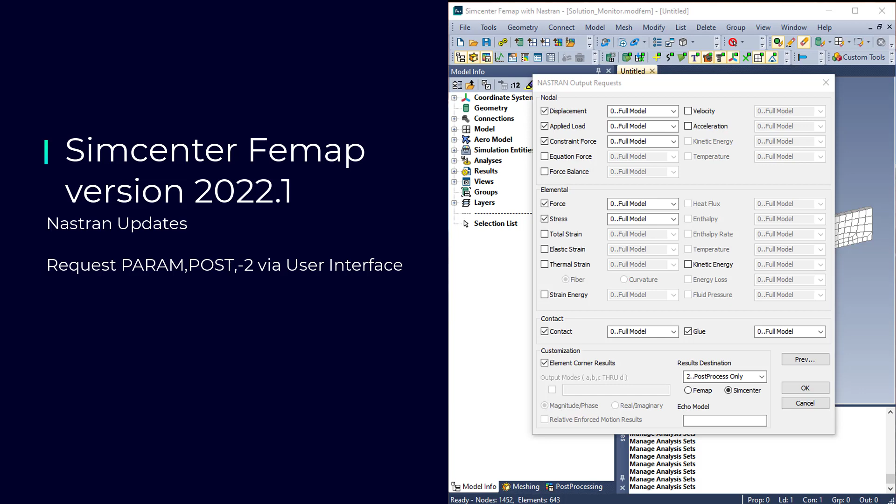In this video, we will be discussing some of the important updates made for Nastran, particularly Simcenter Nastran in Simcenter Femap 2022.1. The first update we will cover is the ability to request Simcenter Nastran to produce an output file, in particular an OP2 file, in a format which can then be used by Femap, other applications in the Siemens Simcenter portfolio, including Simcenter 3D, and other commercially available pre- and post-processors.

To have Femap request output be placed into the OP2 file in this format, we will use the Analysis Set Manager, go to Output Requests, and once in the dialog box, simply select Simcenter under Results Destination, and that is all that is needed. Now Nastran knows to create the param post -2 entry in the input file.

Should you want Femap to always create an OP2 file using param post -2, that can be done using the File Preferences command, going to the Interfaces tab, and selecting Simcenter for the Results Destination option.

One additional thing to remember is that some pre- and post-processors which can read OP2 files created using param post -1, which is the Femap default, require that the model information also be in the OP2 file, which is done by setting param OGEOM to a value of yes. By turning on the Activate OGEOM parameter in this same dialog box, all newly created analysis sets will have the OGEOM option turned on automatically.

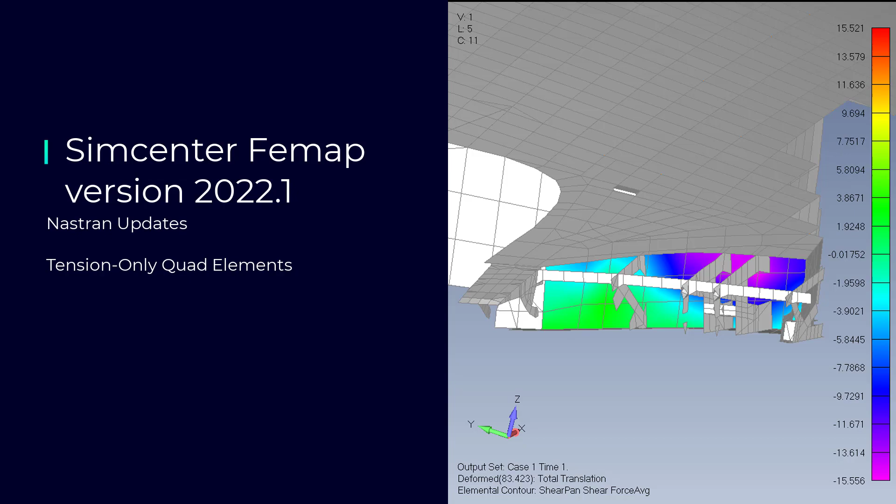The next update we will discuss is support for tension-only quadrilateral shell elements, which has been added to the multi-step nonlinear solution sequence, Solution 401, for Simcenter Nastran 2022.1. The tension-only quad can convert from behaving like a shell element to instead behaving like a shear panel element based on a component direction and a compression allowable, both specified by the user, which then creates a PSHLPNL entry in the Nastran input file.

In Femap, the behavior of tension-only quad elements is controlled by specifying property extensions, which are available when defining a plate property. Simply select the Simcenter Nastran tab, then specify which component direction to use for every quad element referencing that property, such as use X membrane stress or one of the other options.

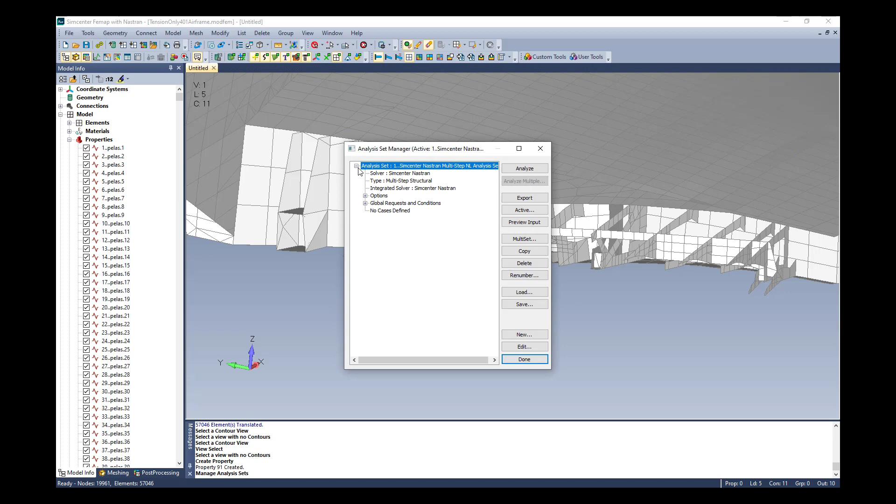You will then also want to specify a value for compression allowable, which is used to determine when a shell element will start to behave like a shear panel. Once converted, the element retains shear panel behavior for the remainder of any sequentially independent subcase and any sequentially dependent subcases which follow. After the property extensions have been specified, the TENSOQD parameter can be specified in the Analysis Set Manager to control the behavior of tension-only quads.

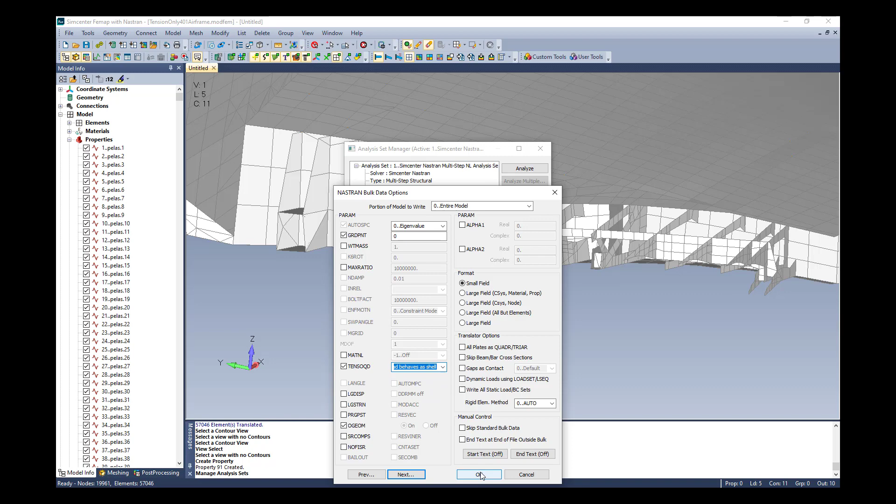By default, the ability to have shell elements convert to shear panel elements is active, but can be deactivated by turning on TENSOQD and setting it to tension-only quad behaves as shell. In addition, anytime tension-only quad property extensions have been defined, the ESHLPNL entry will automatically be added to case control of the Simcenter Nastran input file.

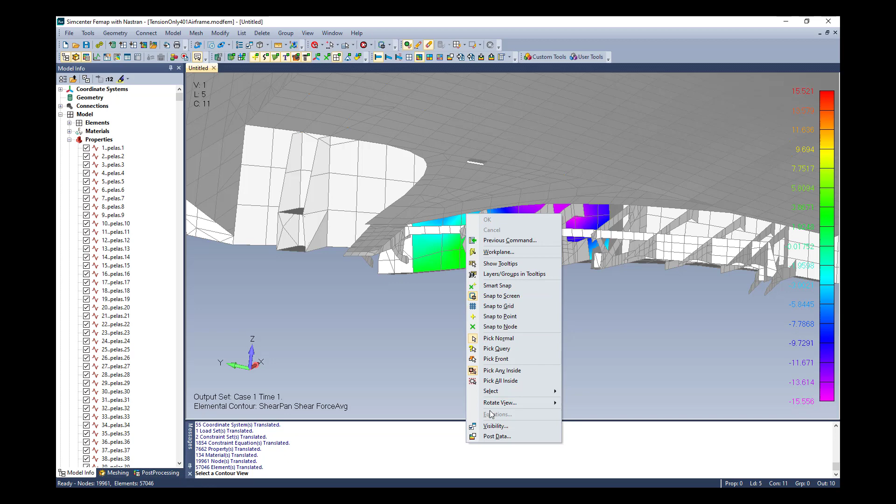Once the analysis has been completed, it is easy to visualize which elements have been converted to shear panel elements by displaying shear panel results. After looking at the shear panel results, it is also possible to look at the shell element results to see which elements were not converted to shear panel elements.

Support for a new way to specify control options for the dynamic design analysis method, often called DDAM, has been added to Simcenter Femap 2022.1. DDAM is performed in 3 steps. First, Simcenter Nastran performs a modal analysis on the structure to calculate the modal participation factors and modal effective mass for each mode. Next, the Naval Shock Analysis Fortran program, NavShock, uses the modal effective masses and natural frequencies calculated by Nastran, along with user inputs, to compute shock design accelerations.

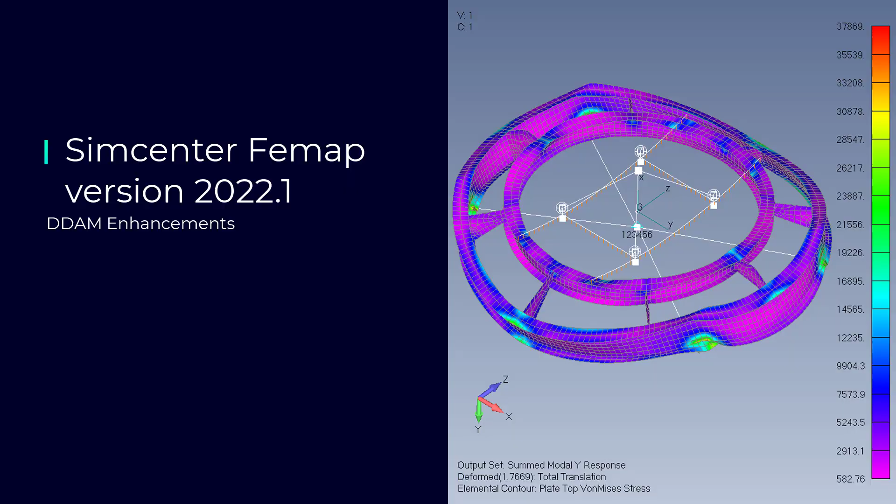Finally, Simcenter Nastran uses the shock design accelerations along with the modal participation factors and natural frequencies to compute the shock response of the structure. The first thing needed within Femap to run a DDAM analysis is an analysis set specified to do a normal modes eigenvalue solution. Once that has been specified, most everything else is controlled via the Nastran DDAM solution options dialog box. So the first thing you want to do is enable DDAM analysis.

If you choose DDAM, that's going to run DDAM using the legacy method. So what this entails is the creation of multiple external files, and all of these options in here basically get written to a control file, which is then sent to the NavShock program.

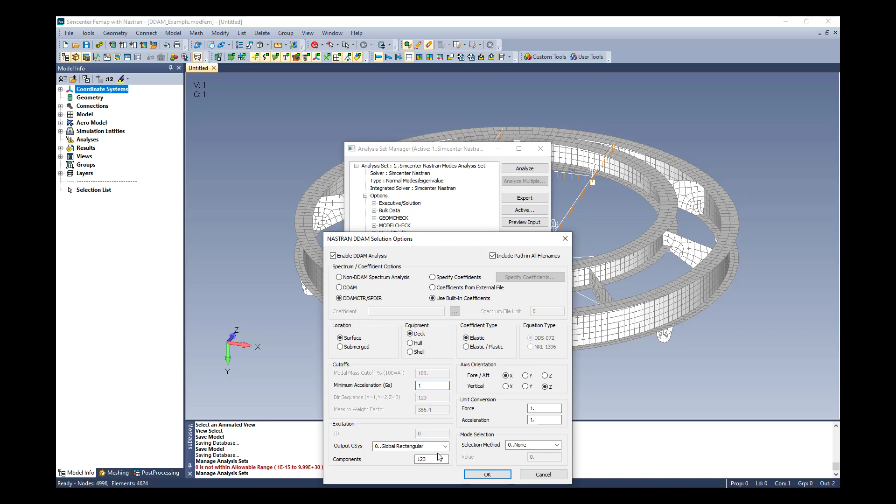Now, if you want to use the new methodology, instead you choose DDAM CTR/SPDIR. So now, instead of all of those controls being written to an external file, they are written to two Nastran entries, which will be included in the Nastran input file. So I'm just going to specify a value there, and then I'm just going to do a preview of the input, and you can see that the values are here for those particular Nastran entries.